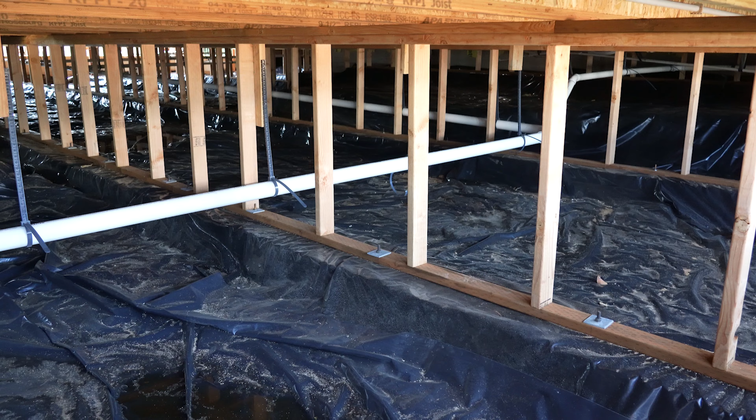This is the State Code Update Training for the 2023 Oregon Residential Specialty Code, also referred to as the 2023 ORSC. This video is the first of a three-part training resource. A separate video covers Chapter 11, Energy Efficiency Provisions of the 2023 ORSC. The third and last video covers Chapters 12 through 24, Mechanical and Fuel Gas sections. Please see these additional videos to view the complete set of significant changes presented by the Division of the ORSC.

All BCD Residential Inspector and Residential Plans Examiner certification holders are required to complete code-related update training, which is provided by the Division. The various certifications that require this training are the Residential Structural Inspector Certification, also known as the CAS, the Residential Plans Examiner Certification, the CAX, the Residential Mechanical Inspector Certification, or CAM, the Specialized Finals Inspector Certification, or SFI, and the Specialized Solar Photovoltaic Certification, the SSI.

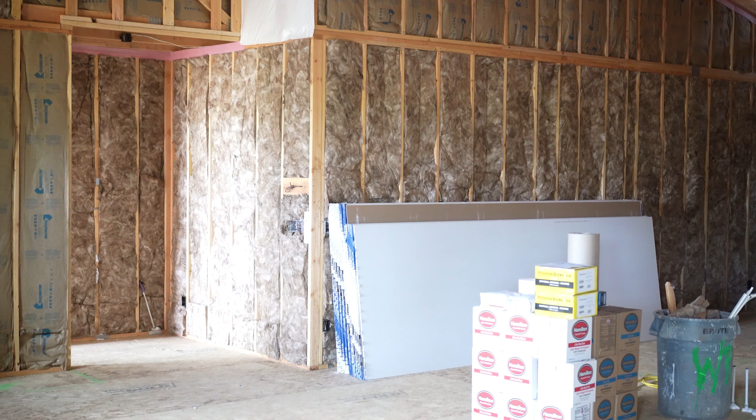The objective for this training is to identify the significant technical changes to the structural, fire and life safety, and general design requirements resulting from the adoption of the 2023 ORSC. At the end of the video, Division contact information will be provided, where you may submit any questions or feedback. Up-to-date contact information for each presenter is also available on the Division's website.

Information about the new 2023 ORSC, such as code adoption process, codebook availability, and code-related publications, is available on the Division's website on the Codes and Standards webpage. We appreciate your attendance and look forward to working through the updates with you.

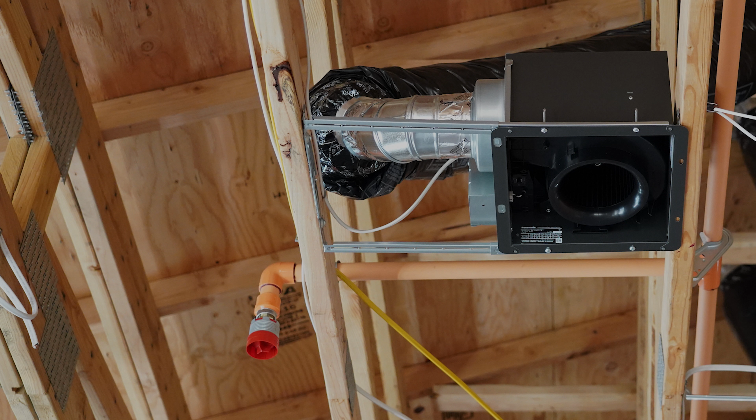As a reminder, our team is a technical resource for our local government partners and other customers. We are always happy to assist and always appreciate hearing from you.

The 2023 ORSC is based on the 2021 International Residential Code, the IRC, with Oregon amendments. For this video, distinct formatting is being used to show the various types of changes. The change summary box highlights the topic covered and provides a brief synopsis. This summary box will identify if the topic is a model code change from the IRC, an Oregon amendment to the IRC, or simply a helpful reminder for a commonly questioned topic where no change has occurred. Where we are highlighting a model code change, we will generally only show the new language added in the 2021 IRC. That language will appear in pink.

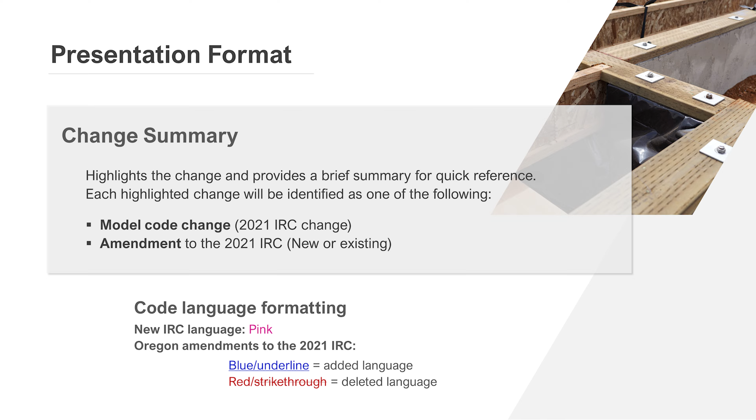Where we are highlighting an Oregon amendment, blue underline will denote added language and red strike-through will denote deleted language. For this training video, the division has created a supplementary code adoption summary that includes all Oregon amendments to the 2021 IRC, the significant IRC changes highlighted in this video, and other important information about the new code. The code adoption summary is linked in the video description below, along with the chapter timestamps to aid in navigation through this presentation.

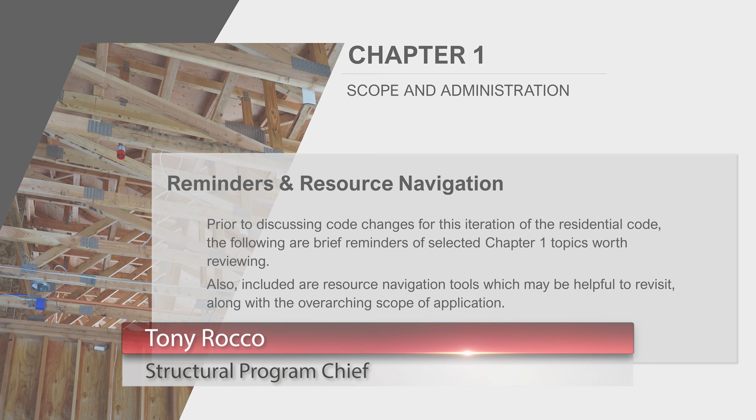Before we get started on the 2023 ORSC code updates, beginning in Chapter 1, we'll set the stage with reminders of how critical it is to always consider the scope of a given code prior to jumping into the technical requirements. For the ORSC, the overarching scope and application are detailed by the leading provisions of Chapter 1.

Over the past 5 years, our division has worked with our legal counsel, local government partners, OBOA, stakeholders, and other customers to further clarify the administrative provisions of both the OSSC and ORSC. Particularly under the ORSC, national model scope creep had created a significant misalignment from our governing authority and statutory charge. On the next slide, we'll quickly revisit the concept of statutory authority in the context of the ORSC scope.

Not all matters included in a nationally promulgated model code are necessarily covered by our statutory authority here in Oregon. This is a key concept to always remember. Just because something is included in the IRC, IBC, or IFC nationally doesn't automatically establish legal authority to regulate that same matter here in Oregon. Oregon revised statutes detail legal authority, not a nationally promulgated code.

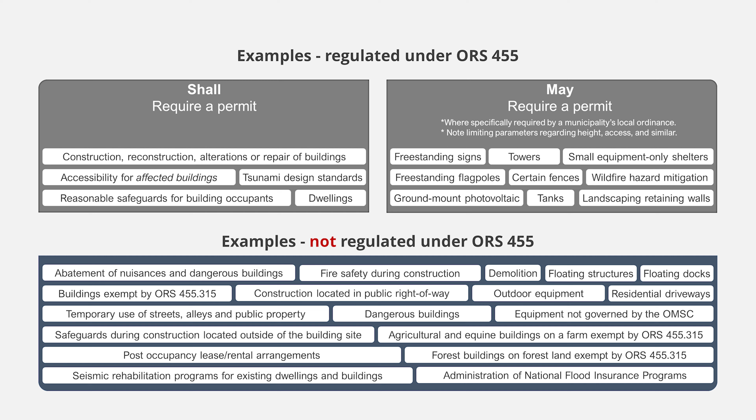As we move into the first slide listing an ORSC section, we keep the consistent theme going of our overarching scope and application, setting the stage for reviewing these code updates.

Looking historically at the original intent and purpose of creation of a dwelling code, it's important to note that it once started out as a collaboration of recommended building practices for places of abode.

Fast forwarding to today's modern code, our low-rise dwelling code, which has become our Oregon Residential Specialty Code, is for residential uses in detached 1- and 2-family dwellings and townhouses. In recent years, we have clarified that other dwelling uses, such as day-to-day business operations, are more appropriately addressed by the OSSC.

Under the 2023 iteration, live-work units meeting the appropriate OSSC provisions, owner-occupied lodging houses, residential aircraft hangars, and detached 1- and 2-family dwellings and townhouses, and their accessory structures not more than 3 stories above grade, are covered by the scope of the code. Other uses, including congregate living, care facilities, and other licensed facilities, are now addressed more accurately via the OSSC.

In some cases, those uses may be permitted to meet the construction standards of the residential code, but the uses are still addressed through the scope and application of the structural code.

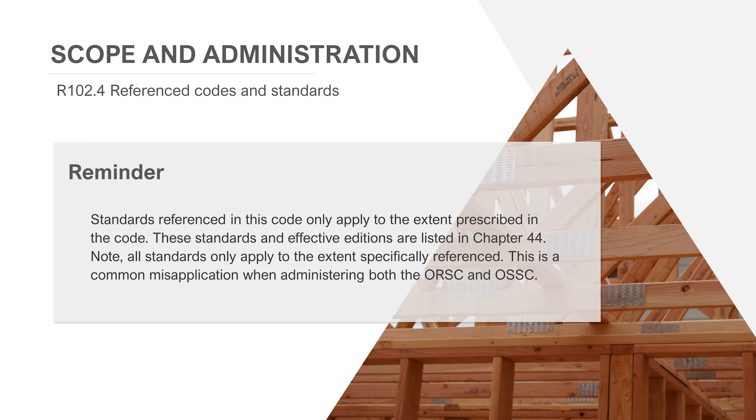Over the past several iterations, our technical team has worked hard to refine the activities listed in section R105.2 as exempt from building permit. In prior iterations from years ago, the list even included items which weren't included in the scope of the code, since the list was originally based on the National Model Code.

A very common misconception is that if some type of activity isn't on the list, then it must mean that activity requires a building permit. Wrong. We don't use the list of exempt activities as some type of reverse authority threshold for requiring building permits. Remember, the scope of the code sets the stage for the permitting authority. Under the dwelling code, we also have a governing statute detailing the items which shall be exempt from permit and fees in our state. This reference is ORS 455-310.

Building on the improvements already made to Section R105.2, in the 2023 ORSC, we have clarified exemptions number 6 for patio, porch, and deck covers, number 8 for non-bearing partitions, 13 for door and window replacements, and number 15 for membrane-covered frame structures. In number 6, we add deck cover to the list of exempt covers and removed a requirement for them to be supported by an exterior wall. Similar to the common detached non-habitable accessory structure in exemption number 1, these outdoor space covers can either be attached or detached, but not more than 200 square feet in usable area.

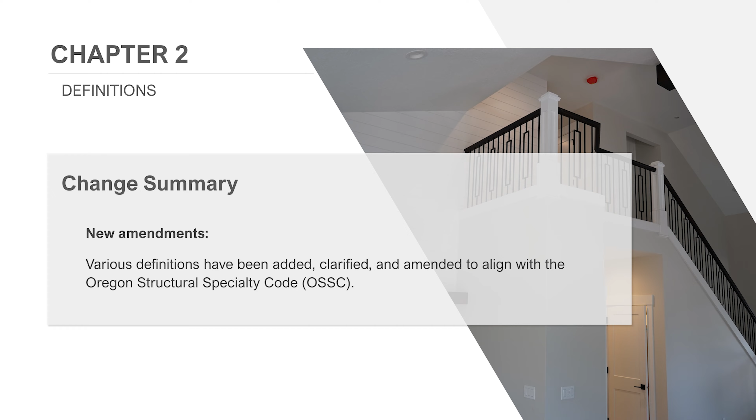Section R202 and our definitions play a critical role in application of the code. Often we overlook highlighting defined term changes during the update training, but for this iteration of the ORSC there are several important changes. Both building area and floor area have been added as long missing defined terms to help clarify the intended limits listed throughout the code. Building area aligns with the definition we know from the OSSC. As we just covered in R105.2, we see the new definition for membrane-covered frame structure to narrow that specific exemption.

Most importantly, the definition of accessory structure has been aligned with the National Model Code. In the 2015 iteration of the IRC, the 3,000 square foot and 2-story limitation from the definition was removed. The accessory structure limitation was originally introduced in 2008 and never matched how the code scoped governed buildings.

The size and height limits have been removed from the ORSC and no longer limit the size and shape of accessory structures. As we covered in Chapter 1, the code still limits all governed structures to a maximum of 3 stories above grade plane in height, but there is no size or square footage limitation for dwellings or now accessory structures. This common sense model code change underscored that most local land use laws will limit accessory structure size, and that it's not aligned with the overall hierarchy of code to limit square footage.

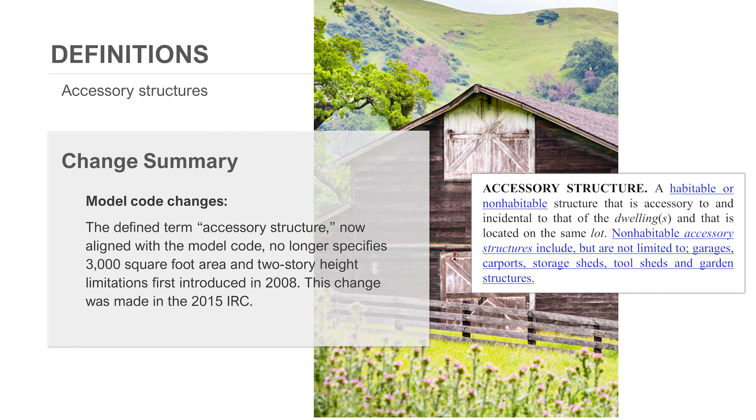Our team will be taking a closer look at this code inconsistency in the near future and will hopefully arrive at a reasonable solution, providing clarification necessary to support predictable statewide application of the exemption for Oregonians.

Hi, this is Jeremy Williams, Structural Program Engineer with the division. I'll be covering some of the structural design related updates in chapters 3 through 6.

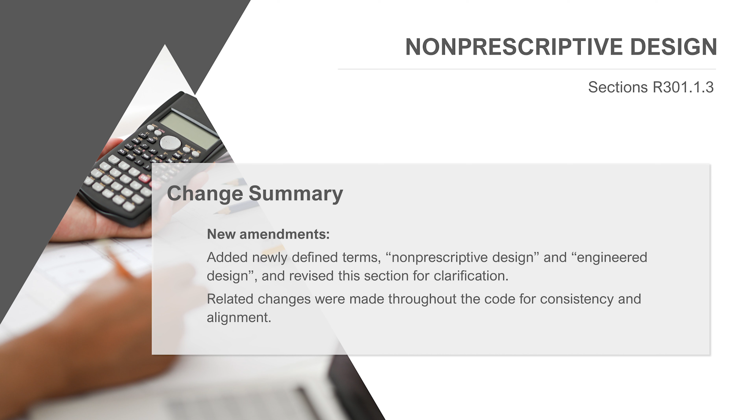Section R301.1.3 has been clarified and renamed from Engineered Design to Non-Prescriptive Design. The Code Adoption Advisory Committee recommended changes here to help reduce confusion regarding the trigger, enforcement, and review of designs or portions of designs that fall outside the prescriptive recipes within the ORSC.

Non-prescriptive design is now a newly defined term, which includes two types of designs: those required to be prepared by a registered design professional, and those exempt from that requirement per Oregon's engineering and architecture licensing laws. This section now requires the submission of a non-prescriptive design instead of an engineered design for your review and approval for portions of the project that fall outside the prescriptive provisions of the code. This will make more sense as we look at the new definitions.

But before going there, note that the lower portion of this section has been struck. That portion was originally recommended as an Oregon amendment during the 2021 ORSC adoption process to clarify scope and intent, but was recommended for removal this cycle because it contradicts the preceding sentence, which allows a design in accordance with the OSSC.

Here are the new definitions for non-prescriptive design and engineered design. Non-prescriptive design is defined as the design of structural elements exceeding the limits of Section R301 or otherwise not conforming to the prescriptive provisions of the ORSC. The design shall result in a system capable of supporting the loads prescribed in the ORSC or OSSC and provide a complete load path that transfers those loads from their points of origin through the load-resisting elements and foundation to the supporting soil.

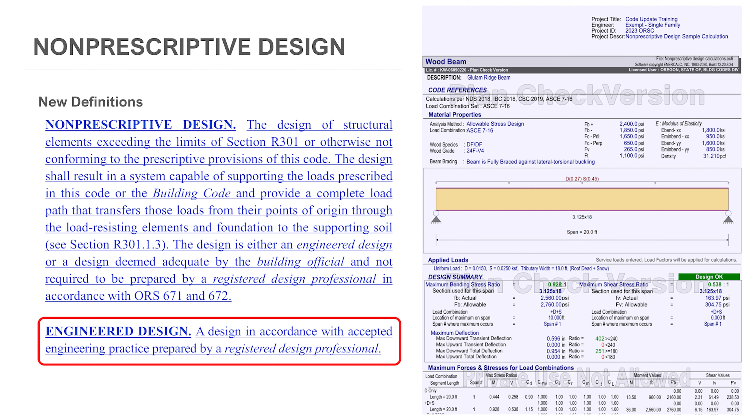A non-prescriptive design is either an engineered design, which is also a newly defined term, or a design not required to be prepared by a registered design professional in accordance with Oregon's architecture and engineering statutes, but deemed adequate by the building official. Engineered design is defined as a design in accordance with accepted engineering practice prepared by a registered design professional.

It's a new specific allowance for submitting electronic plans where allowed by your building department. Some of you have been allowing electronic submission for some time now, while others may not have implemented it yet.

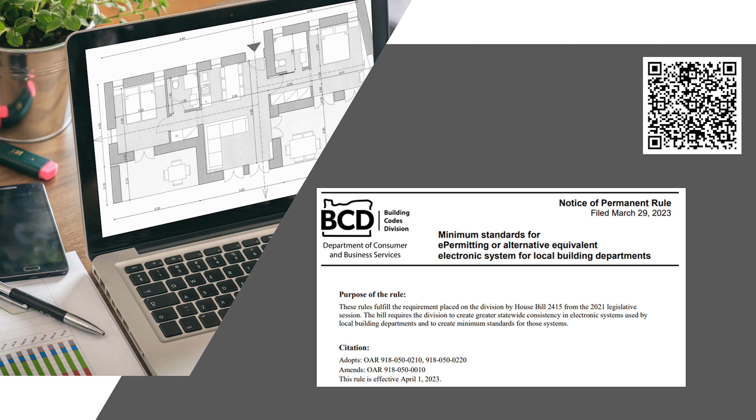Reminder that with the passage of House Bill 2415, which was intended to improve statewide consistency for electronic processes for reviewing plans, issuing permits, and performing field inspections, Oregon Administrative Rule 918-050 was amended accordingly and requires all municipalities to have the capability of accepting electronic submission of construction documents by January 1st, 2025.

As mentioned previously, BCD does not interpret the Oregon State Board of Engineers and Architects rules and statutes. If you have any questions related to their rules and statutes, our best recommendation is that you reach out to them directly. Here's their contact information for your reference.

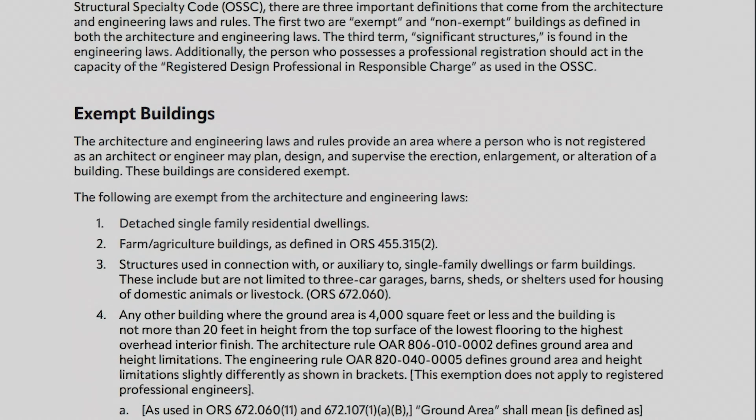We now have a direct path in the residential code for shipping containers that are repurposed for use as dwellings or their accessory structures.

This new model code language points to Chapter 31 of the OSSC for compliance. Also note the new definition in Chapter 2, which is the same as the OSSC.

You may remember that Eric covered Section 3114 when we presented the 2022 OSSC update training last year. It contains both detailed and simplified structural design requirements for the use of containers depending on application. You no longer need to rely solely on an alternative approval process in accordance with Section R104.11 for repurposed shipping containers.

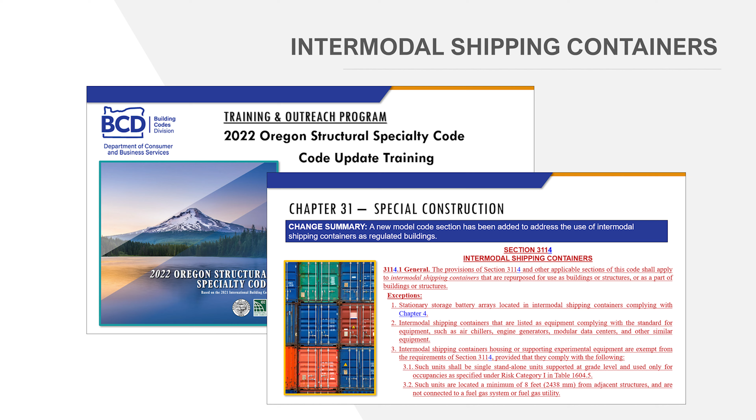Last year, BCD hired CPP Wind Engineering consultants to complete a study of our codified special wind regions and associated basic design wind speeds. The purpose of the study was to update our OSSC and ORSC wind design criteria based on statistical analysis of the most current meteorological data available, in accordance with ASCE 7-16. Thanks go out to the Structural Engineers Association of Oregon and Washington for their collaboration and coordination in this effort.

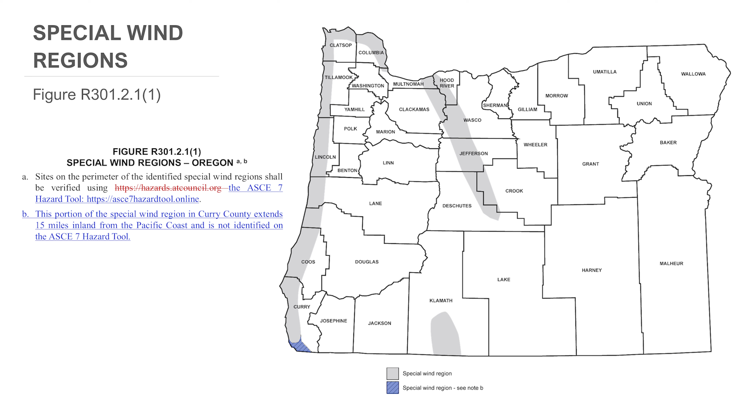The reason for the switch from the Applied Technology Council Hazards by Location tool to the ASCE 7 hazard tool is because the ATC tool will no longer be updated for future editions of ASCE 7. From the ATC website: with the availability of ASCE's hazard tool in the free domain, we feel there is no longer a unique need for the ATC Hazards by Location website, and ATC will be deferring to ASCE for providing free hazard information to the profession.

These same related special wind region wind speed changes were made to Table 1609.3 and Figure 1609.3 as an interim amendment to the 2022 OSSC, so both codes are currently aligned on this subject.

You can find this online tool by reaching the ASCE website or by scanning this QR code. Here's what you see when you navigate to the ASCE 7 Hazard Tool website. First thing you're going to get is this pop-up welcome screen message, which you can close.

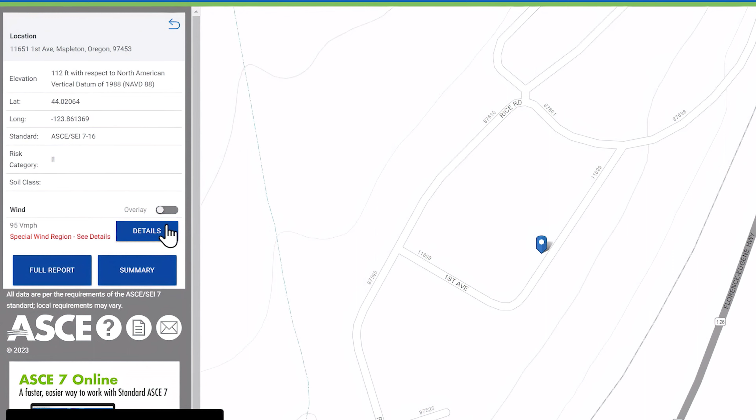Enter your site address of concern. Here I'm entering one in Mapleton, Oregon. You select the reference standard version ASCE 7-16, select risk category 2, toggle on the wind load type, and select view results. You see right away it says we're in a special wind region. See details, and we can toggle this overlay under the wind row here to see that we are in the special wind region hatched pattern.

There's no change to the irregular building section of the code to report on, but we're sharing an IRC provision here that wasn't adopted in Oregon in case you see it in an ICC publication or training course and are wondering about it. The 2021 IRC brought in a new irregularity trigger for homes on steep hillsides based on a proposal from structural engineers representing FEMA and the Applied Technology Council. This was based on findings of vulnerability of such dwellings in the 1994 Northridge, California earthquake.

117 significantly damaged hillside dwellings were identified in reconnaissance reporting, 15 of which had collapsed, and another 15 were found to be on the verge of collapse. The general concept here is that the different rigidities of variable height cripple walls for crawl spaces taller than 7 feet affect the seismic behavior of the structure beyond the assumed behavior contemplated by the prescriptive lateral provisions provided in the code. The Code Advisory Committee recommended disapproving and deleting this new language because they felt the cost increase associated with the new trigger isn't warranted based on no reported issues or concerns in Oregon on the matter.

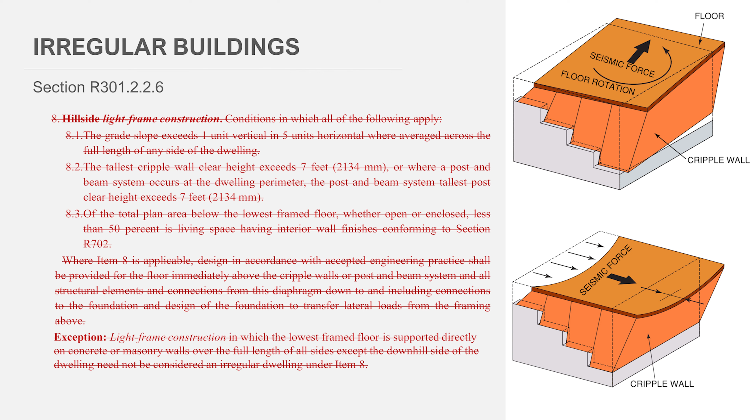The ORSC now points directly to our plumbing code for seismic restraint of water heaters. We've had inconsistent provisions in the past due to language in this section in Chapter 13 of the IRC that differed slightly from the corresponding plumbing code provision.

The only related change in Section 507.2 of the 2023 Oregon Plumbing Specialty Code is that the exception was clarified by specifically adding seismic design category B, which was always the intent. Note that the related historic water heater seismic strapping interpretation number 15-02 is being updated to reference the 2023 OPSC.

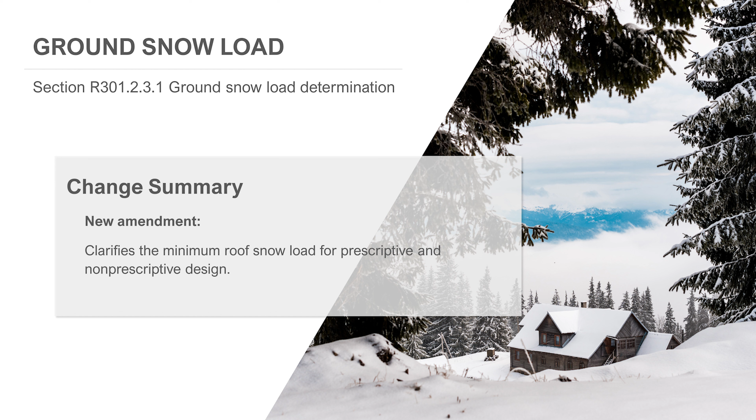Within the ground snow load determination section, we've clarified the minimum snow loads for prescriptive and non-prescriptive design as an Oregon amendment. The minimum ground snow load for use with the prescriptive design provisions and associated tables within the ORSC is still 36 PSF, and the minimum roof snow load is 25 PSF, except where the roof snow load is calculated in accordance with Section 1608 of the OSSC. The key word here is calculated.

Section 1608 of the OSSC refers the user to Chapter 7 of ASCE 7-16 for roof snow load calculation and sets a minimum roof snow load of 20 PSF plus 5 PSF rain-on-snow surcharge for roofs less than or equal to 1 unit vertical in 12 units horizontal, or roofs that constrain runoff by parapets or other similar obstructions. Reminder that the only time roof snow load is referenced for design in the ORSC is in Section R802.10.2.1, Applicability Limits for Wood Roof Trusses, which states that for consistent loading of all truss types, roof snow load is to be computed as 0.7 times ground snow load. 0.7 times the 36 PSF ground snow load equals 25 PSF roof snow load.

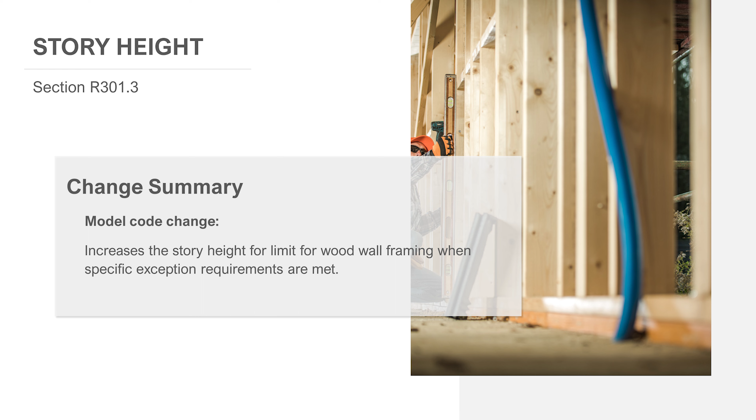A new model code exception in this section conditionally allows wood frame story heights up to 13 feet 7 inches instead of the previous limit of 11 feet 7 inches. To meet this new story height exception, studs greater than 10 feet up to 12 feet in unbraced height have to meet exceptions 2 and 3 of Section R602.3.1, which we'll cover when we get to Chapter 6. The wall bracing for the building needs to comply with Section R602.10, and lateral restraint has to be provided at the bottom and top of the wall by the foundation, floor, ceiling, or roof diaphragm.

A major challenge that each of our local government partners face on a regular basis is deciphering the use of non-technical land use, developer, and real estate terms that don't neatly align with our technical code. Popular terms include condos, triplex, quadplex, cottage, cottage cluster, and even ADU.

Unfortunately, none of these popular terms mean anything under application of our technical code. Most often, the structural configuration proposed, along with the stated intended use, will determine the appropriate code application.

When considering the ORSC limitations, if we have stacked units and more than a single detached two-family dwelling, which is permitted to be stacked, the project will be regulated by the OSSC. If the proposed configuration meets the townhouse definition, where there are no stacked units, and each dwelling unit is separated from the next, from the foundation to the roof, the project will be regulated under the ORSC.

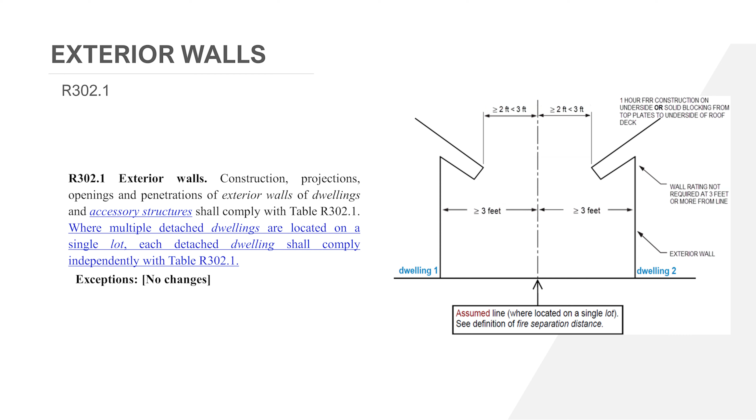Note the long-standing amendment of reduced minimum fire separation distance from the model code 5 feet is retained in our Oregon-specific 3 feet. In many cases, this minimum distance is superseded by local land use laws and required setbacks for front, side, or backyards.

Our historic townhouse provisions of section R302.2 have been retained. Minor, non-technical editorial corrections throughout the section have been made, and in the 2021 iteration of the ORSC, all existing figures were updated and recreated.

Our technical team did propose reducing the number of Oregon amendments and aligning more closely with the model IRC regarding townhouses. One possibility was to retain these existing amendments as a statewide alternate method for customers. However, the committee and advisory board elected to retain the existing R302.2 as it existed in prior iterations.

Additionally, the base model code included a new provision for detached two-family dwellings and dwelling unit separation. That model code change specified that only a single 1-hour wall was required even where real property lines separated the two units of the detached two-family dwelling. This model code change was disapproved by the committee and board, and our existing language was retained, which provides options for customers proposing this real property line separation and specifying not less than a 2-hour separation in these instances.

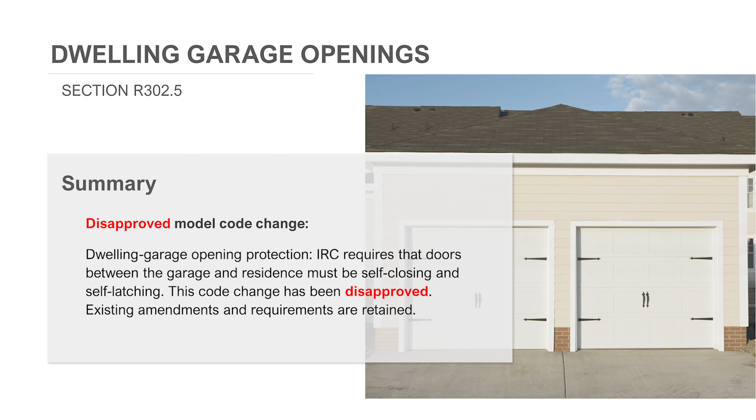As we look at the provision, we see the struck model language at the end of the charging provision in R302.5.1.1.

In Oregon, garage-to-dwelling doors can be solid wood, not less than 1 3/8 inches, solid or honeycomb steel, not less than 1 3/8 inches, or 20-minute fire-rated door assemblies. These doors are not required to be self-closing or self-latching.

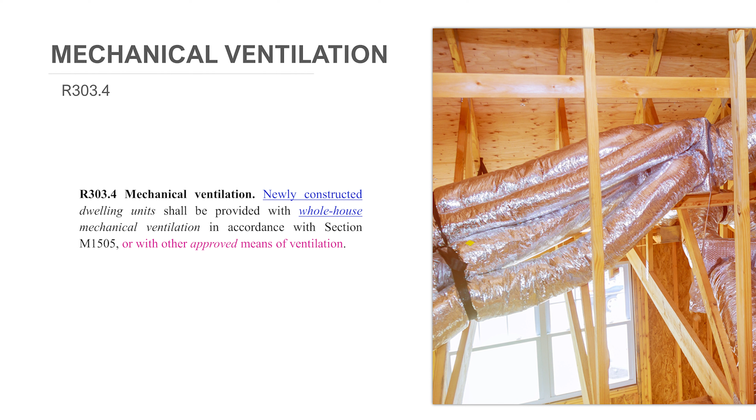This has been added to the provision for clarification. In addition, design flexibility has been included, permitting other means of ventilation to be approved by the building official in place of the prescriptive whole house ventilation system.

Emergency escape and rescue openings, or EEROs, are a major component of ORSC governed safeguards. In the 2023 ORSC, a number of changes have occurred in Section R310, and the next few slides will walk us through those new provisions.

This includes the addition of a minimum 36-inch wide path from an enclosed yard or court to a public way, the replacement of the term window well with the more encompassing term area well for those EEROs located below grade, and additional flexibility for basement alterations, additions, and conversions to habitable space. We'll walk through all of these changes one by one.

One common question, particularly for townhouse configurations, is regarding egress windows which open directly to an enclosed backyard. The long-standing intent has now been codified for this configuration. In prior iterations, while the intent was for a yard or court to open to a public way, the minimum width of that opening from the enclosed yard or court to the public way was never specified.

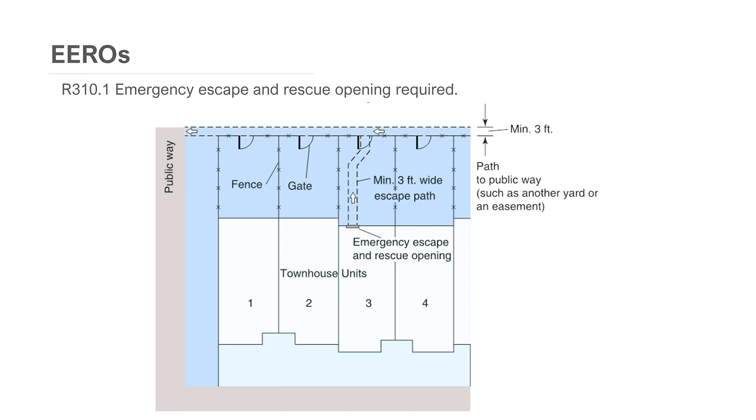In section R310.2.4, the new language specifies that when a required EERO is located beneath a porch, deck, cantilever, or similar projection, not only must our unobstructed pathway be not less than 36 inches in height until we get out from under the projection, but it now must be not less than 36 inches in width as well. Think of this as an unobstructed tunnel, 3 feet by 3 feet clear, until we get out from under that deck, porch, cantilever, or similar projection.

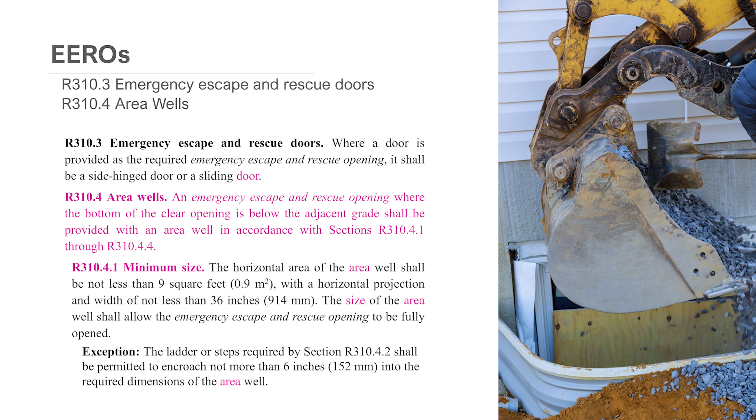In the new 2023 ORSC, the term window well has been removed and merged with the term area well. We see the new charging language in section R310.4, as well as the aligned term throughout the subsections. There are no technical changes to the old window well requirements beyond this terminology adjustment. In the 2021 iteration of the ORSC, both window well and area well existed. Now in the 2023, we only have provisions for area wells.

In section R310.6, we now have an additional exception specific to dwelling additions. This exception points to section R310.7.1 as a deemed to comply option for complying with the EERO provisions in the context of an addition.

We'll cover the details of R310.7.1 on the next two slides, but when considering its application, it's important to note the triggering language. The R310.7.1 compliant EERO is permitted for dwelling additions containing new sleeping rooms and for dwelling additions of basement areas.

Specific to alterations of existing basements, this new provision clarifies two things. First, where a new sleeping room is created in an existing basement, for example a basement conversion, an EERO is required to be provided in that new sleeping room. And where an existing basement undergoes alterations or repairs, including a basement conversion to habitable space, an emergency escape and rescue opening is not required from the basement area.

Similar to the exception added for dwelling additions in the previous slide, this provision has an identical exception permitting the EERO in the converted basement's new sleeping room to meet R310.7.1. Let's take a look at that provision.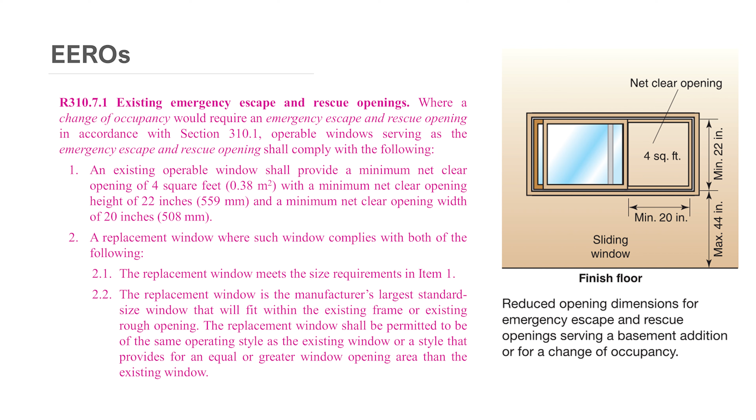Here in section R311, several important changes have occurred. First, in subsections R311.7 and 8, we have existing Oregon language retained as well as alignment with new model provisions regarding stairways and ramps which are regulated and those which are not. There are several common nuances to note here.

Next, a new model exception has been added regarding exterior landing slopes where the landing must facilitate surface water drainage away from the building. In addition, we've also included a critical reminder from ICC about the bottom landing of exterior stairways that is commonly overlooked.

When considering stairways, it's important to make the distinction between regulated stairways and those stairways which are not regulated. In the 2021 ORSC, we included new Oregon language intended to help clarify application of R311.7 throughout the state. Here in the 2023 iteration, that language is further clarified.

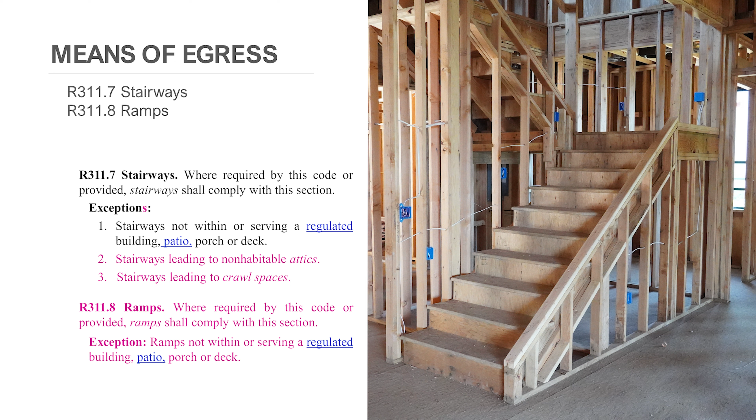Stairways which are not regulated by R311.7 include any stairway not within or serving a regulated building, regulated patio, porch, or deck. Any stairway, drop-down ladder, portable ladder, etc. leading to non-habitable attics, such as storage attics, since storage is not habitable space, and any stairways, ladders, steps, etc. leading to crawl spaces, as defined.

These are critical nuances to consider. The most common is regarding the bonus truss attic storage space. Assuming the space is for storage only, which is non-habitable, customers can use drop ladders, portable ladders, potentially non-compliant stairs, etc. to access the non-habitable attic. Additionally, ramps not within or serving a regulated building, regulated patio, porch, or regulated deck need not meet the provisions of section R311.8.

Under our long-standing stairway walking surface slope limitations, we now see a new model exception here in section R311.7.7. This exception now allows a steeper slope for exterior stairway landings required elsewhere in code to drain surface water from the landing.

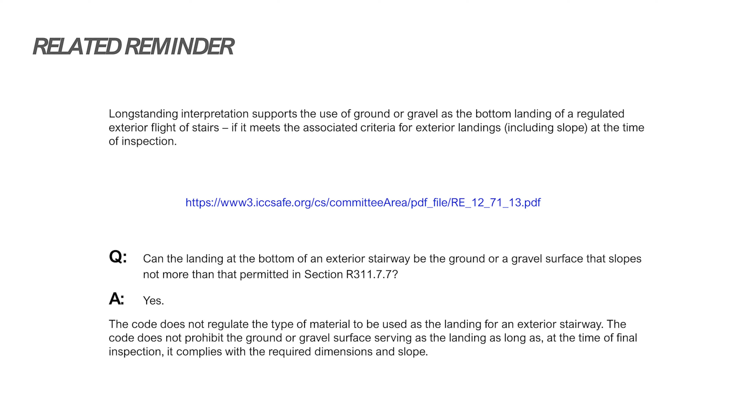Here's a great clarification regarding our measurement for determining when window fall protection is required. While we have clarified this measurement several iterations ago for our maximum EERO height above the finished floor, this measurement detail was only delineated previously via interpretation and ICC's stated intent. Now, in section R312, the language clarifies that the measurement is taken from finished floor to the bottom of the clear opening. Another important reminder is that this threshold for requiring fall protection is intentionally different when considering ORSC-governed dwellings and OSSC-governed Group R2 units. The OSSC threshold remains at 36 inches, where our ORSC trigger remains at 24.

Here we have a section view and detail of our measurement and other considerations to trigger the fall protection safeguard. The bottom of our clear opening must be at 24 inches or higher above the finished floor, or we must have less than 72 inches of fall to either grade or a flat surface at least 36 inches in width on the exterior side of the window to not need fall protection.

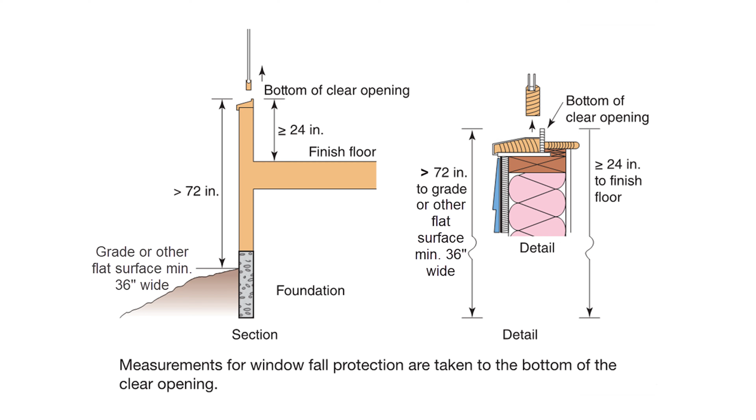Section R314, smoke alarms. This change is going to cover a couple of new location requirements for smoke alarms.

The first new location is found in section R314.3. This new requirement will require a smoke alarm at the end of a hallway when there is a room with a ceiling height that is at least 24 inches higher than the hallway. In addition, there's a minor Oregon amendment to this new section where 'bedrooms' is struck and replaced with the term 'sleeping rooms,' because bedrooms is not a defined term in the ORSC.

The next new smoke alarm location requirement is found in section R314.3.1, and is related to proximity to cooking appliances. Items 1 through 3 have not changed. Item 1 requires ionizing type alarms to be installed not less than 20 feet from a permanently installed cooking appliance. Item 2 reduces that distance for ionizing alarms to 10 feet when they are equipped with an alarm silencing switch. And item 3 requires photoelectric type smoke alarms to be installed not less than 6 feet from a permanently installed cooking appliance.

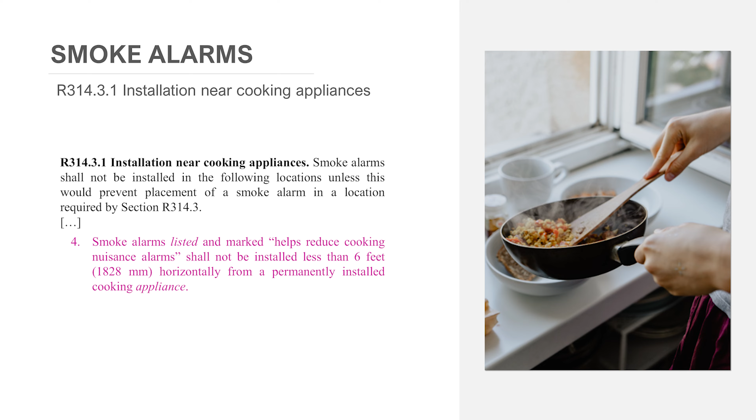Section R317, protection of wood and wood-based products from decay. The provisions for the protection of wood against decay have not changed significantly for quite a few code editions, so this update accomplishes a much-needed overhaul. There was no intent with the changes to significantly change the technical content, only to clarify the requirements and clean up some errors in syntax and correct some misleading text.

Section R317.1. On this slide, we see some changes to items 1, 2, and 3. For item 1, columns were added to give them a required clearance from exposed earth in crawl spaces. This isn't really new; it's generally in conformance with the old exception that was deleted. Item 2 also includes columns, and again, this was to find a home for that requirement due to the deleted sections. And then item 3 is an existing Oregon amendment specifying what can count as an impervious moisture barrier.

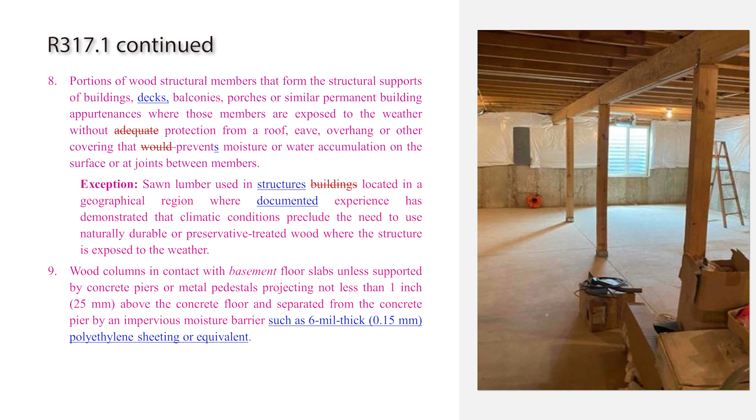R317.1 continued. Now we move on to items 8 and 9 in the same section. As you can see, there's a lot of pink language, which indicates new model code language. For item 8, the language was actually moved from a deleted section, R317.1.3, for geographical areas. This language seemed to require wood members exposed to the weather to be treated or naturally durable only if a need was demonstrated. The code now requires protection as the general rule and provides an exception for drier geographical regions. Note that an Oregon amendment is added to that exception requiring that need to be documented.

For number 9, this language was also deleted from section R317.1.4, and this is the language that allows the 1-inch clearance for wood columns with basement concrete slabs. Also an Oregon amendment there clarifying what works as an impervious moisture barrier, or at least an example of what would work.

Section R320, accessibility. This change is intended to clarify the accessibility provisions that are specific to live-work units. When we get to section R320.1, you can see that there are some amendments there also. Now, those are existing amendments, so no change there.

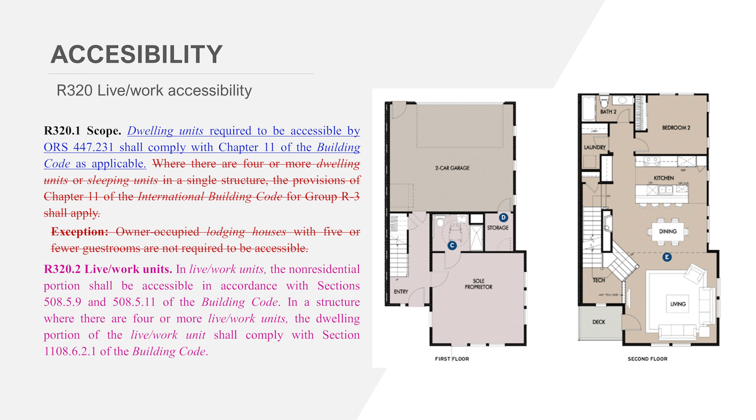The change is in R320.2, specific to live-work units. This change is clarifying that the non-residential portion of a live-work unit is subject to accessibility. There's a reference to 508.5.9 and 508.5.11 of the Oregon Structural Specialty Code. 508.5.9 is a general reference to Chapter 11, and 508.5.11 is a reference for accessible plumbing features. There's also additional language that clarifies where there are 4 or more live-work units, the dwelling portion shall comply with Chapter 11 of the Building Code based on the configuration.

Section R323, storm shelters. This change includes some new model code language that is deleted and also a new model code definition.

In section R323.1, we find part of the related changes. Also just a reminder that this section is existing and it doesn't require storm shelters to be constructed. It does provide some guidance for where storm shelters are constructed and how they are to be constructed.

You'll note that the sealed documentation language in red is struck out here. That's the new language that was added to the 2021 IRC. This was struck to align with our Oregon requirements for OSBAE and OSBEELS, where a registered design professional is not required. And finally, you can see the new definition that was added for storm shelter.

Section R324, Solar Energy Systems. This change is a fairly large one in that it incorporates the previously approved provisions that were found in the OSSC into the ORSC without any technical changes. The rooftop-mounted photovoltaic systems requirements will now be found entirely in Section R324 for those within the scope of the ORSC. This language was brought over unchanged from the structural code previously found in Section 3111. That language is still in the structural code and will be amended as we move forward for that next iteration. No changes in the requirements at this point.

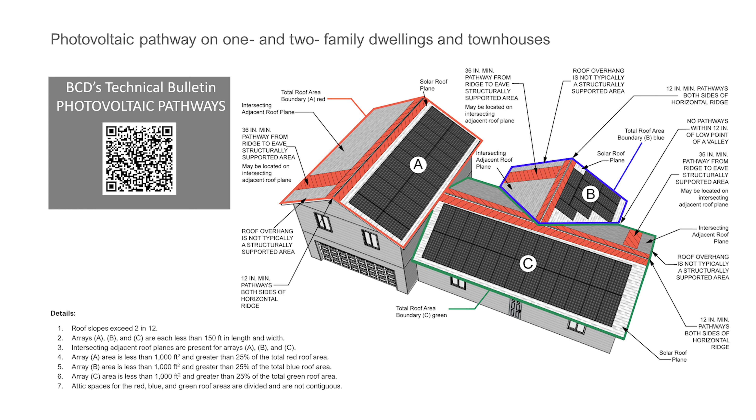Still in Section R324, we're going to talk about some clarifications that have been made to firefighter access and escape requirements. Firefighter access and escape pathways related to rooftop solar can be a little daunting to apply. So recently, the division developed a new technical bulletin intended to clarify and explain the provisions. A link to that bulletin is on this slide, as well as an example of one of the illustrations. The bulletin helps to explain things like what an intersecting adjacent roof is and how to deal with scenarios where there are disconnected attic spaces.

Section R324.7, Solar Ready. This change incorporates some of the existing Solar Ready provisions that were found in the 2021 Oregon Residential Reach Code.

Section R324.7.2, Solar Ready Construction. So the provisions you see on this slide are new to the ORSC. They were brought in from the 2021 Reach Code. And then all of the existing Solar Ready provisions were moved from Chapter 11, Section N1107 to 324.

For the change you see here, these four exceptions were brought over from the Reach Code, and they allow some variance to whether or not solar ready construction needs to be included. There are provisions for size, provisions for total solar resource fraction. So if there's not enough sun, then it doesn't make sense to put it in, and that term is newly defined as well.

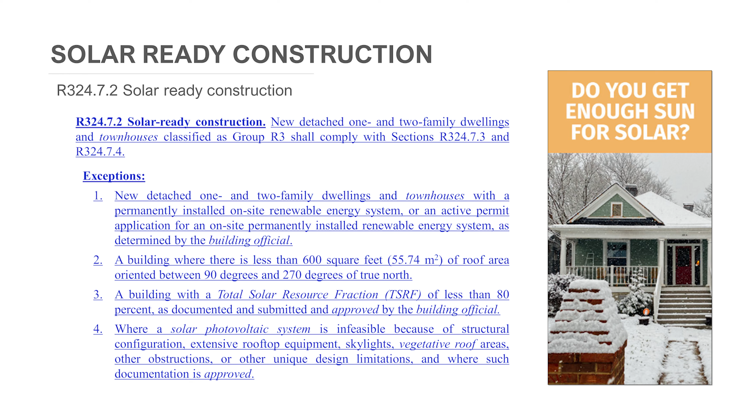Moving on to Section R324.7.3, the only change here to these provisions is a move. These were previously found in the 2021 ORSC in Section N1107.4. These are the interconnection pathway requirements, and they were simply moved to this section.

The final piece to these solar ready provisions is a new requirement that also came from the 2021 Reach Code, for some reserved panel space. There needs to be 2 dual pole circuit breaker spaces reserved, and it needs to be marked reserved for future solar.

Still in Chapter 3, now on to Section R327. R327 covers wildfire hazard mitigation, and we're going to talk about some changes to the scoping and some upcoming changes that are going to apply to R327.

The primary change to the existing R327 has to do with the scoping provisions. The previous scoping provisions have been deleted and replaced with what you see here in R327.1.1 for local adoption. This allows a local jurisdiction to adopt this section without following the local adoption statute 455.040. There's a few requirements tied to the adoption.

The other piece to the local adoption scoping changes is a requirement for notification found in Section R327.1.2. This section requires a local jurisdiction to notify the State of Oregon Building Codes Division and also provide a copy of any locally adopted map showing the areas where R327 is going to apply.

The final piece to the R327 discussion is what this looks like moving forward. Many of you are probably familiar with Senate Bill 762 from back in 2021 that was passed by the legislature following the 2020 wildfires. And then in 2023, Senate Bill 762 was revised under Senate Bill 80.

The piece that ties to R327 for these bills is the creation of a wildfire hazard map statewide. When that map is finished, which is still currently in the works, any homes located in areas designated as high hazard and also within the wildland urban interface will then be subject to R327.

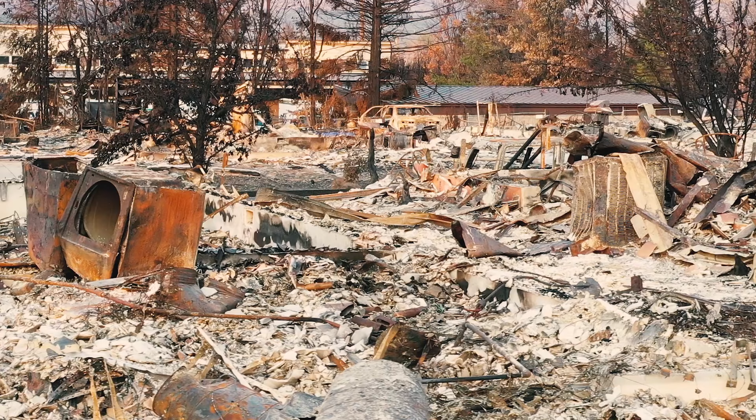So after the map is finished, there'll be a 6-month grace period before R327 becomes mandatory. Also, any local jurisdiction adoption that we discussed in the previous slide, or that had previously adopted before the scoping changes, those will be supplanted by this new wildfire hazard map.

In Section R401.2, an Oregon amendment we had in prior iterations has been brought back by recommendation of the Code Advisory Committee and Board. This is the requirement to provide lateral restraint between the bottom of the foundation wall and top of footing construction joints in low seismic regions. Although there is no specific requirement for this in the IRC, we confirmed that this requirement aligns with ACI 332, PCA 100, and the assumptions built into the IRC.

As you can see, this provision is now much more specific than the prior amendment. It provides a keyway width and depth dimension and location requirement, and also provides an option to use the vertical bar with standard hook at 48 inches on center option in accordance with Section R403.1.3.1, which is the requirement for high seismic regions.

Or the applicant can propose any other lateral restraint option for your review and approval. Again, this is consistent with meeting the model code intent and assumption that foundation walls are laterally restrained at their top and bottom.

Remember that the intent of this section is to prevent overloading the main floor diaphragm in high seismic regions by limiting its span. You now see that the bracing requirement is for exterior walls and required interior brace wall panels of buildings in D0 through D2 are to be supported by continuous footings in accordance with the new table R403.1.2, in lieu of the confusing part of the provision which had an embedded exception followed by an additional exception.

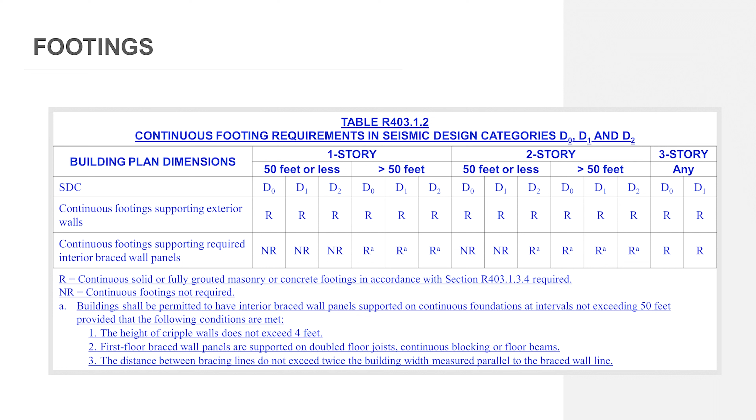So now you can simply apply your project-specific variables to the table to quickly determine the requirement. There's no change to the application. It's just been changed to tabular format with a footnote for clarification and consistency.

Some of you may have had a local policy on whether or not you allowed wet setting mud sill anchor bolts because the code didn't specifically address it. This model code change now allows wet setting them under certain conditions.

Where the builder chooses to wet set the mud sill anchor bolts, the code requires that they vibrate the concrete if there is physical resistance or consolidation is hindered when they attempt to place them. As you can see, this is a risk that the contractor will be taking on and not subject to your foundation inspections if they choose to wet set.

Note that this does not include proprietary anchorage products such as hold-down anchor bolts, which are required to be installed in accordance with the manufacturer's installation instructions.

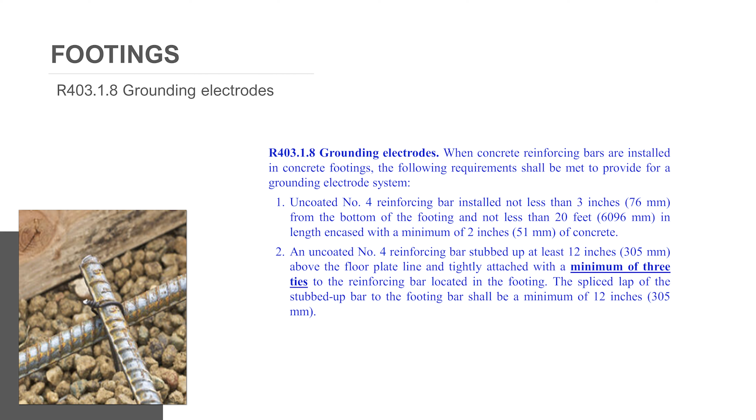Section R403.1.8. This change includes a new minimum tie requirement for grounding electrodes. The grounding electrode language that you see here on this slide is all blue because it's all existing Oregon amendment. And for clarity, only the new language is underlined. So the new language is in item 2, which further clarifies what tightly attached means.

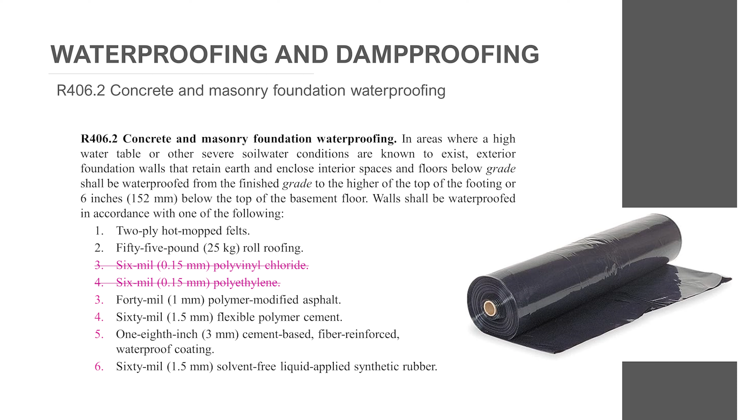Section R408, underfloor space. This change is a reorganization for clarity. The underfloor space reorganization of section R408 includes a breakout of a long-running paragraph that is now broken into numbered sections to help clarity. It also clarifies that the 1 to 150 ventilation rate is only applicable in radon counties.

The lower rate is allowed elsewhere because vapor barrier is required as a minimum. And also the language that was previously found and is still found in Appendix F was moved to this section as well that prohibits coverings over ventilation openings in radon areas.

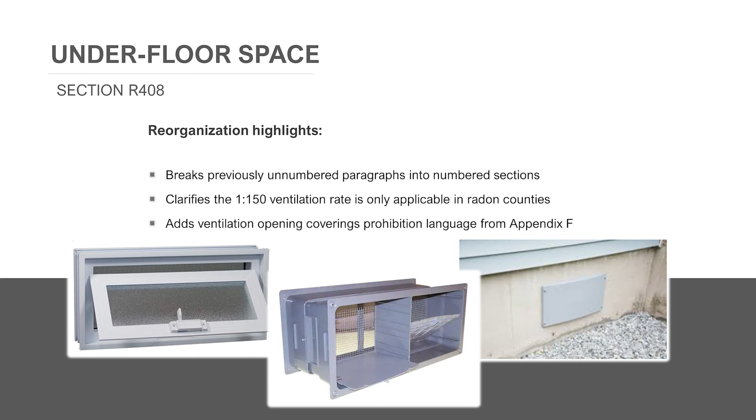Section R506. This change retains the Oregon Amendment for 6 mil vapor retarders under concrete slabs. Along with the previous requirement that removed the 6 mil allowance for concrete walls and foundations, the model code also made a change to R506.2.3 that removed 6 mil polyethylene for under concrete slabs and replaced that with a minimum 10 mil that met ASTM E1745.

Because the 10 mil was not readily available, especially meeting that ASTM standard, the governing board decided to stick with the language previously for 6 mil. So the 10 mil was not accepted, and the 6 mil still is allowed in Oregon.

There were quite a few changes that occurred in both the 2021 and 2024 IRC that expanded the prescriptive deck design options and provided further clarifications on existing provisions. The Code Advisory Committee recommended jumping ahead and pulling in provisions from the 2024 IRC to reduce the number of times stakeholders have to shift gears on learning these provisions.

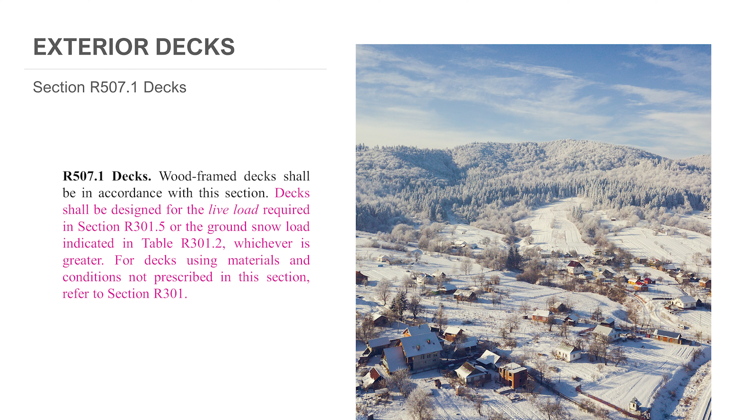Remember that Section R301.2.3 snow loads says that buildings in regions with ground snow loads greater than 70 PSF shall be designed in accordance with Section R301.1.3, non-prescriptive design. You'll see this expansion from 40 PSF to 70 PSF ground snow load limit in all of the prescriptive tables throughout this section.

The wood materials subsection no longer mandates preservative-treated or naturally durable lumber, and instead only points to Section R317 for compliance. As Eric pointed out earlier, you have the exception to Item 8 of Section R317.1, which provides flexibility to use lumber other than naturally durable or preservative-treated where your local climate conditions allow. Although these changes are shown in blue underline here as an Oregon amendment, they are from the 2024 IRC. This will be the case for the remainder of the changes shown in Section R507 unless I note otherwise.

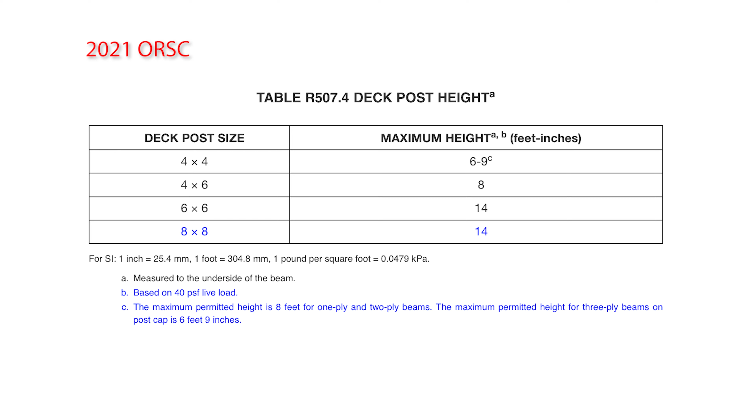As you can see, the deck post height table R507.4 has changed significantly. Previously, the height limit in the table was only a function of the post size specified. Now there are additional variables such as ground snow load up to 70 PSF, post species, and tributary area, which is consistent with the minimum footing size table you've become familiar with in the 2021 ORSC. Although I'm only showing part of the table here for simplicity, it takes up about 2 pages in the code because there's additional rows of different species for each loading scenario that includes southern pine, redwood, western cedars, ponderosa pine, and red pine posts.

So now when you calculate the tributary area to each deck footing when doing your minimum footing size check using table R507.3, you can use that same tributary area calculated with table R507.4 to check the maximum post height.

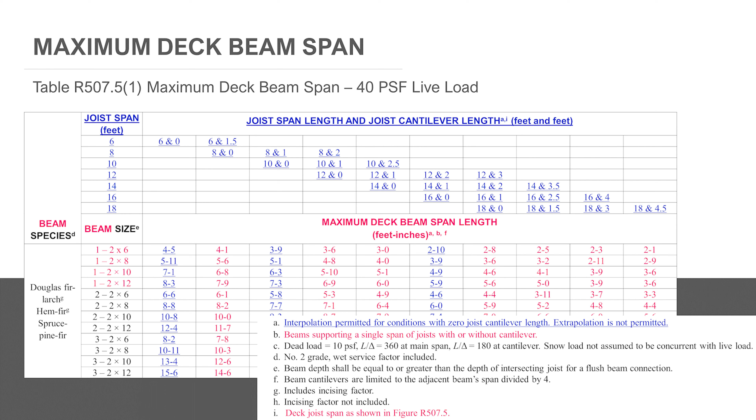The deck beam span tables were reformatted, expanded, and revised in the 2021 IRC, as shown in pink here, and further changes were made during the 2024 IRC process, as shown in blue. Instead of just 2 rows for wood species, there are now 3, but note that I'm only showing 1 here for clarity. You can see that single-member 2x beam options have been added for all wood species, and the table has been expanded to capture various joist cantilever conditions.

There are 4 different deck beam span tables depending on the loading condition. Table R507.5 parenthetical 1 is for 40 PSF live load, and tables R507.5 parenthetical 2 through 4 are for 50 through 70 PSF ground snow load respectively. Note that per footnote A, interpolation is only allowed where the deck joists do not have cantilevers. As you can see, the changes to these tables broadens the application of prescriptive deck framing and reduces overly conservative prescriptive designs from past code iterations. Although these tables have expanded, they are more seamless to use for design and plan review.

Let's see what minimum size hem-fir beam would be needed for this example, assuming 70 PSF ground snow load. The deck joist span length is 14 feet with a 3-foot 6-inch cantilever span length, and the deck beam span length is 8 feet. Going back to table R507.5 parenthetical 4 and looking at the 14-foot joist span row and finding the associated column with the 3-foot 6-inch cantilever span length, we follow it down to the allowable span that's equal to or greater than our 8-foot span to determine the required beam size. For this example, we see a triple 2x12 hem-fir beam is acceptable.

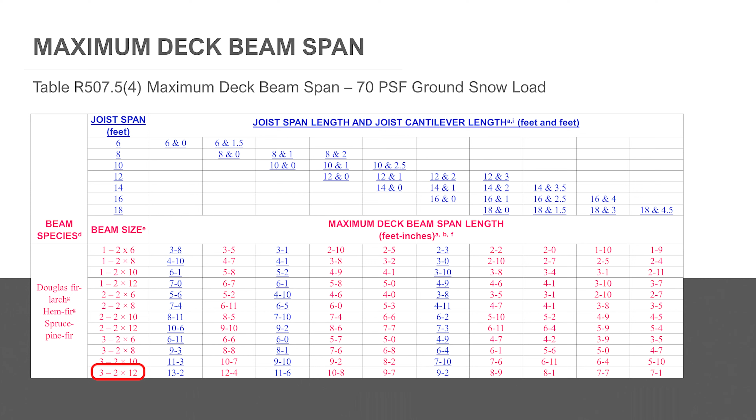Consistent with the changes we saw for the deck posts and beam tables, the maximum deck joist span table has been expanded. It now includes up to 70 PSF ground snow load conditions and additional rows of different species for each loading scenario that includes southern pine, redwood, western cedars, ponderosa pine, and red pine, in addition to the Doug fir, hem fir, and spruce pine fir rows that I'm showing here. Also note that the allowable deck joist cantilever is now completely captured by this table instead of having to check the tabular value against the 1/4 the joist span value as was required in the 2021 ORSC.

The 2021 ORSC had a footnote buried in the deck fastener and connector specifications table requiring the user to comply with the NDS for lag screw pre-drilling requirements to avoid splitting the deck ledger. This was definitely not helpful for users unfamiliar with the NDS. So the 2024 IRC struck that requirement and instead added specific pre-drilling requirements for the 1/2-inch diameter lag screws consistent with the NDS. The installer first needs to drill a 5/16 to 3/8 inch diameter hole through the ledger and all the way through the floor band joist. Then drill that hole to a 1/2-inch diameter just through the ledger and exterior wall sheathing.

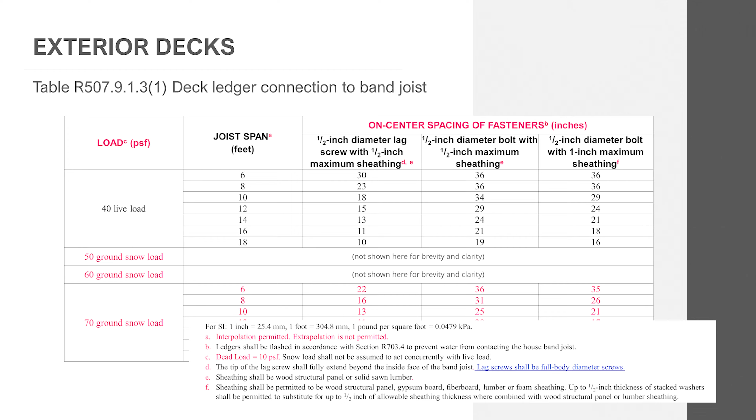The last change to mention in section R507 is the added flashing detailing for the ledger attachment. You first see it in the ledger attachment figure, where it now specifies the L or Z flashing under the decking against the exterior wall, and specifies that the WRB be lapped over that flashing for consistency with the minimum weather-resistant exterior wall envelope requirements in Chapter 7.

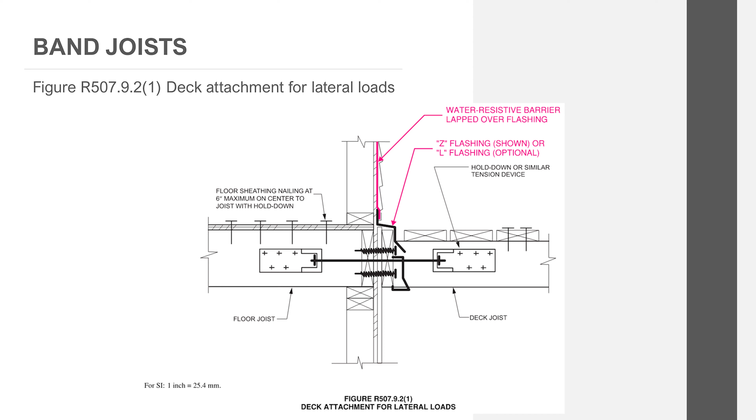The same added flashing detailing has been added to figure R507.9.2(1), the through-bolt with tension connectors option for an attached deck lateral restraint system. It was also added to figure R507.9.2(2), the other option shown in the code for a deemed-to-comply attached deck lateral restraint system.

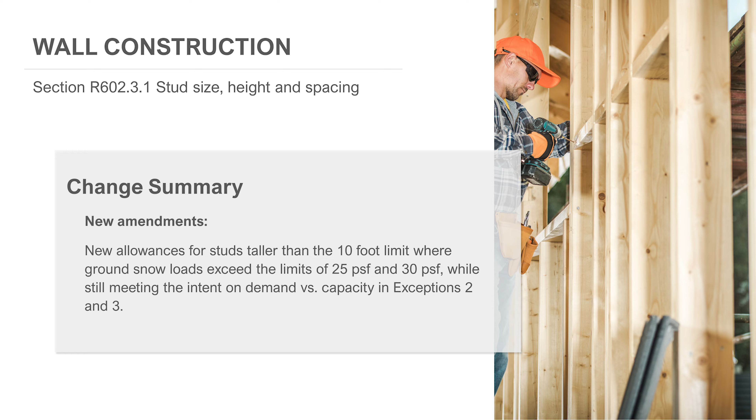The base requirement for prescriptive stud size, height, and spacing is still per table R602.3(5), which limits their height to 10 feet. The only way to prescriptively allow studs taller than 10 feet is to comply with exceptions 2 or 3. The Code Advisory Committee recommended amending these exceptions to work with our minimum ground snow load of 36 PSF. The model code set an upper threshold of 25 PSF ground snow load for exception 2 and 30 PSF ground snow load for exception 3, so neither one could be applied outright in Oregon.

During the 2017 ORSC update training, we explained how you could approve scenarios with ground snow loads greater than 25 PSF as long as the tributary load to the studs was within the intended code limit. And exception 3 was struck at the time as an Oregon amendment because the reference table couldn't be used with ground snow loads greater than 25 PSF.

Now, exception 2 specifically allows Doug fir number 2 studs at 16 inches on center up to 18 feet in height, or up to 20 feet in height when spaced at 12 inches on center, where the basic design wind speed is less than or equal to 130 miles an hour and supporting a roof only with max tributary load of 150 pounds per foot of site-specific ground snow load. So no change to how we informally interpreted this for the 2017 ORSC, but now it's codified for the 2023 ORSC.

And the 30 PSF ground snow load limit in exception 3 has been changed to 36 PSF to allow use of table R602.3(6), which is the alternate stud size, height, and spacing table. To make this table work with the 36 PSF ground snow load limit instead of the model code limit of 30 PSF, the maximum roof and floor spans in the table were reduced to 83% as an Oregon amendment. 83% of 36 PSF is 30 PSF, so the tributary snow load to these studs is the same for the 2023 ORSC as the model code.

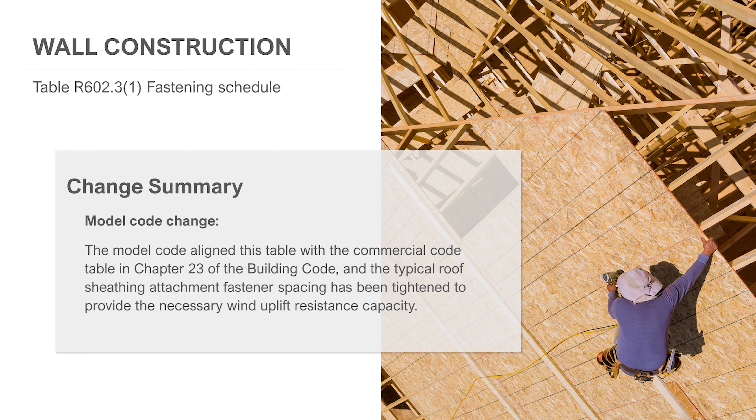Item 1 has added roof rafter and roof truss blocking fastening provisions. Item 12 is just a relocation of the king stud to header fastening requirement that we saw buried in section R602.7.5 of the 17 ORSC, with more fastener options now. And items 31 through 33 have been updated.

Specific to roof sheathing up to 3/4 inch thick, note the significant change from 12-inch on-center fastener spacing at intermediate supports to 6 inches on center, and the requirement per footnote F to further tighten that spacing to 4 inches on center for gable end roof framing and intermediate supports within 4 feet of roof edges and ridges, where the basic design wind speed is greater than 130 miles an hour in exposure B or greater than 110 miles an hour in exposure C. Since the roof sheathing nailing may not be easily observable during your inspections, you may want to consider noting it during plan review, or as a courtesy, informing your general contractors and framers during inspections to make them aware of these new roof sheathing fastening requirements.

There's also a significant related change in the alternate Table R602.3 footnote 1, which allows the use of staples to attach roof sheathing.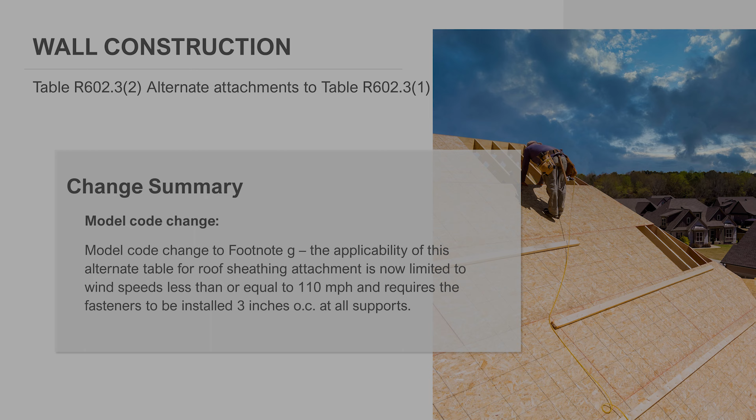In the 2021 ORSC, the tabular values listed could be used for roof sheathing attachments as long as the basic design wind speed was less than 130 miles per hour. But now the roof sheathing footnote G requires that the listed fasteners be installed at 3 inches on center at all edges and 3 inches on center at all intermediate supports, and only allowed where the basic design wind speed is less than or equal to 110 miles per hour.

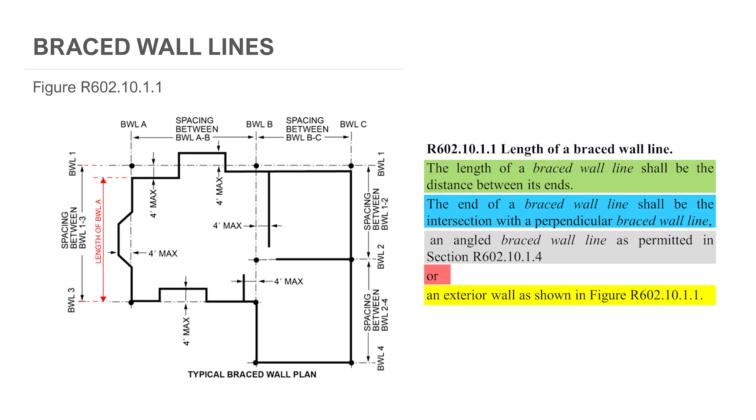The Code Advisory Committee recommended a change to the 900 square foot room exception in Table R602.10.1.3 brace wall line spacing. The new language changes the wording of room to floor area enclosed by brace wall lines to allow more flexibility while still meeting the same model code intent, which is to allow this exception to go from 25-foot wall line spacing up to 35 feet one time on a project without having to adjust the required bracing per Table R602.10.3(4).

This row in this table is somewhat arbitrary and was a proposal that got pushed through at the national level by homebuilder lobbyists several iterations ago to address the regular occurrence of great rooms in today's homes. From a structural design perspective, the lateral force resisting system does not care or know where the interior partition walls are. So this amendment brought forward by the committee makes sense from a practical application perspective and aligns with the model code allowance.

The term floor area used here is newly defined in Chapter 2 and used elsewhere in the code. A reminder is that this 900 square foot exception is not the only path to allow spacings of brace wall lines between 25 to 35 feet in high seismic. Instead, the last row here in this table is the default approach, which just requires that the seismic wall line spacing adjustment factor from Table R602.10.3(4) be applied to the design.

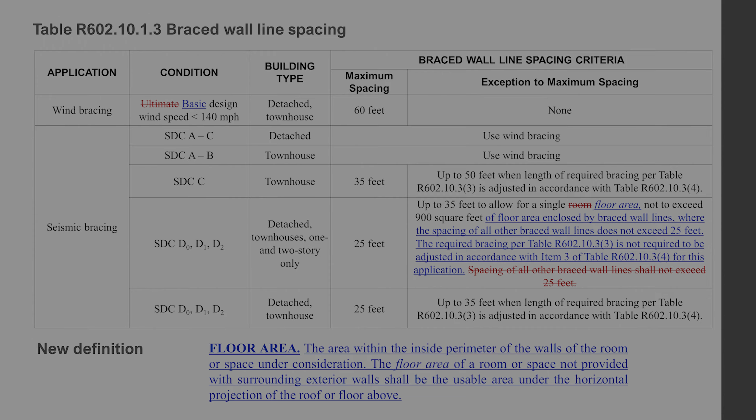A new 10 foot from the end of a brace wall line exception in high seismic regions has been added to clarify the hold down requirements. It clarifies that the hold downs otherwise required for alternate brace walls, portal frames, and BVWSPs meets the intent of the hold down requirement we're familiar with in Exception 1. This change now codifies the informal interpretation we provided in response to questions on this in the past.

Three-story dwellings in seismic design category D2 are now completely outside the prescriptive lateral provisions. Previously, Table R602.10.3(3), bracing requirements based on seismic design category, allowed the user to utilize the prescriptive bracing provisions for the top floor and middle floor, but not the lowest floor of a three-story dwelling in seismic design category D2. Now those options are gone, and it's clarified that three-story dwellings in seismic design category D2 are required to be designed in accordance with Section R301.1.3 as a non-prescriptive design.

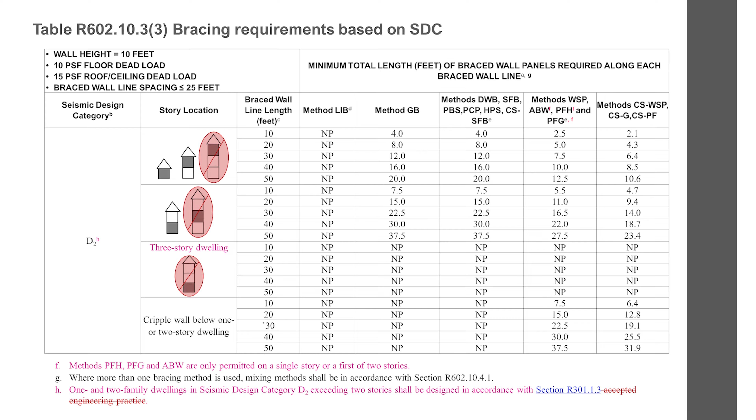Chapter 3 allows story heights up to 13 feet 7 inches now, which we went over earlier. And all of the heights shown in the condition column of this table are consistent with wall heights, not story heights. We pointed out the model code inconsistencies here to the International Code Council and found out they are providing further clarification in the 2024 IRC consistent with this amendment.

And footnote G is new, which just reiterates the model code change we just talked about that clarifies three-story dwellings in seismic design category D2 require a non-prescriptive design in accordance with Section R301.1.3.

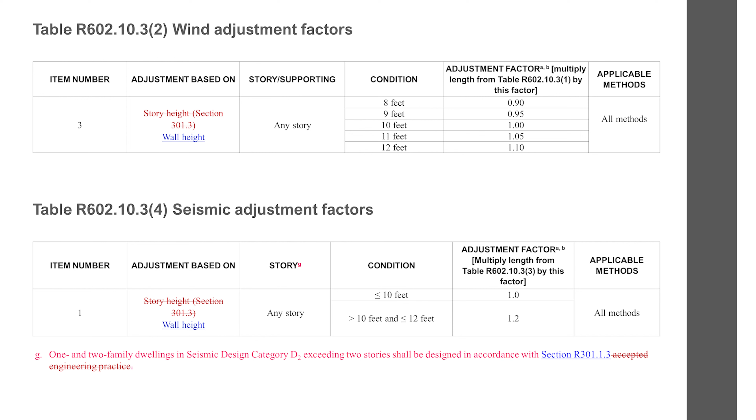A new Oregon amendment in the wind and seismic adjustment factor tables changes the name of the story height adjustment factor to wall height adjustment factor for consistency with the rest of the code, and a new model code footnote has been added to clarify three-story requirements in seismic design category D2.

We won't be looking at the specific changes in the wall bracing for dwellings with stone and masonry veneer in high seismic sections, but just be aware that the whole section has been reformatted, reorganized, and clarified for consistent application of the provisions.

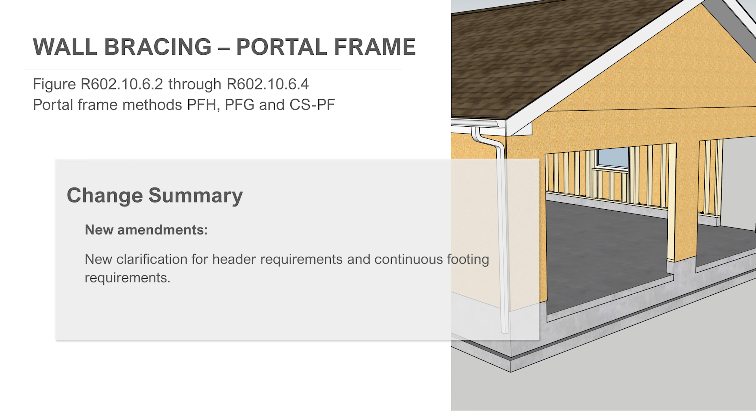Oregon amendments have been made to the prescriptive portal frame figures to clarify the header and continuous footing requirements elsewhere in the code, and to help minimize chance of misapplication. We've clarified that the minimum header size noted in the figure has to be checked against the minimum header size required by section R602.7 for gravity loading design. And we've modified the foundation portion of the figure to show the foundation wall reinforcement and updated the cross section to correctly show the continuous footing.

Here's the update to the method PFG figure. Note that we reference the continuous exterior wall footing requirements per section R403.1 under the garage opening for clarification. And similarly, here are the updates to the CS portal frame figure.

Not a lot of substantive change noted for Chapter 7 of the code. However, here's a significant one regarding water-resistive barriers. At the model level, our long-standing R703.2 has expanded, adding additional prescriptive compliance options in place of the prior language, which included other approved products of equivalent performance. One reason for this change is that standard 15-pound tar paper is no longer the most common practice. Particularly in our state, higher efficacy WRBs are more commonplace due in part to our long-standing Oregon-specific drainage plane requirement of section R703.1.1.

A couple of considerations here are the potential overlap with the drainage plane requirements of section R703.1.1, in particular, the exceptions to providing the 1/8-inch standoff between the WRB and the exterior wall covering or veneer, and the distinction of the two provisions. For example, if we are using 15-pound felt and we aren't providing pan-flashing details at all window and door openings, we must provide the 1/8-inch standoff between the exterior veneer and the WRB. It is important to remember that section R703.2 compliance is only one piece of meeting the R703.1.1 drainage plane provisions.

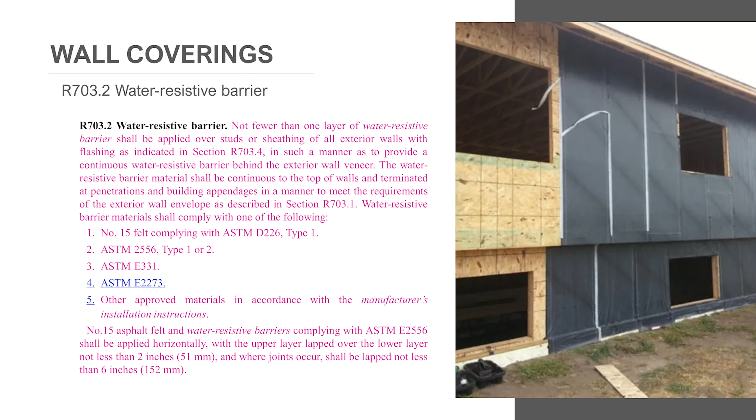The other major change in Chapter 7 is the introduction of a prescriptive path for all soffits. These provisions are organized based on site design wind pressure, as we'll see on the following slides. Previously, there were no specific provisions regarding soffit material and soffit fastening in the code.

In new section R704.1, we see the charging guidance of the new section. Where our wind pressure is 30 psf or less, we go to section R704.2. Where our wind pressure is greater than 30 psf, we use R704.3. How do we determine the wind pressure being referenced here?

These subsections round out the rest of the soffit section. For wind pressure of 30 psf or less, we see R704.2 and then the associated subsection based on material. For wind pressure greater than 30 psf, we see R704.3 and then the associated subsections according to the material used. In both cases, note that the prescriptive soffit materials are limited to vinyl, fiber cement or hardyboard, hardboard lumber, and wood structural panels (WSP), such as exterior plywood or oriented strand board (OSB). If the material proposed is not one of these, then the charging language guides us to use the manufacturer's written installation details, aka the MIIs or the cut sheets.

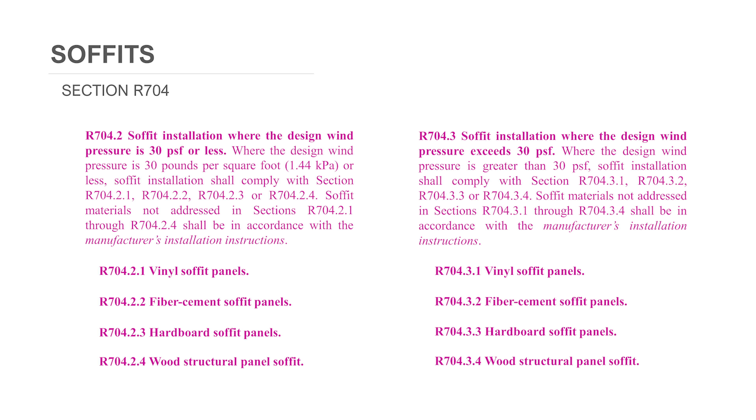Appendix F, Radon Control Methods. The changes made to Appendix F were intended to align more closely with the EPA's nationally recognized standards for radon control.

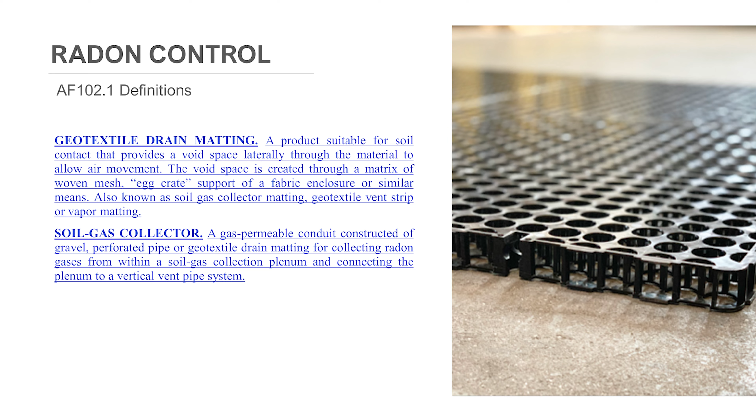The primary change to Appendix F has to do with new provisions for soil gas collectors. Under the previous requirement for a passive gas collector system, a pipe had to be vented up through the roof and it just needed to have a T under the vapor barrier in the crawl space. There was no extension of the pipe, and this made it difficult for future expansion to an active system.

So if the passive system isn't working and you have to add a fan, which there's a requirement for an electrical outlet in the attic for a future fan, then work had to be done in the crawl space to make that new active system effective.

So now there are three different requirements. You can extend 10 feet of perforated pipe, 5 feet in each direction from the T. You can do a geotextile drain mat that we talked about on the last slide under definitions, or you can have a trench of gravel. But any of these three provide a longer area than just a T for the gas to be pulled out if an active fan is added later.

Appendix H, deck, patio, or porch covers. This change aligns the title with changes that were made back in Chapter 1 and adds deck and porch to what was otherwise patio covers, and also adds some clarifying language.

To add to light straw clay and straw bale appendices, we now have a new appendix, Appendix U, addressing a more prescriptive approach for cob construction. This methodology is often referred to as Adobe and is common in some areas of the Southwest and Midwest. There are quite restrictive limits on seismic design categories, and the appendix still relies heavily on non-prescriptive design, as Jeremy from our team covered previously in this presentation.

Often, local land use laws may further limit the potential for landowners to construct unique dwellings such as cob homes. Our team often receives customer inquiries regarding cob construction options, and we now have a related appendix detailing additional minimum requirements for customers to consider when evaluating the options for cob designs.

3D printed homes is a methodology that has become a trending option for increased housing production and increased density in areas of our nation. New subdivisions have been successfully constructed using 3D printed construction standards in Texas, Arizona, New Mexico, California, and there are even several current projects here in our state of Oregon.

This new model appendix is short, relying heavily on R104.11 and the AM&M request path, but it does codify the UL 3401 standard, which outlines a performance compliance methodology for 3D printed homes.

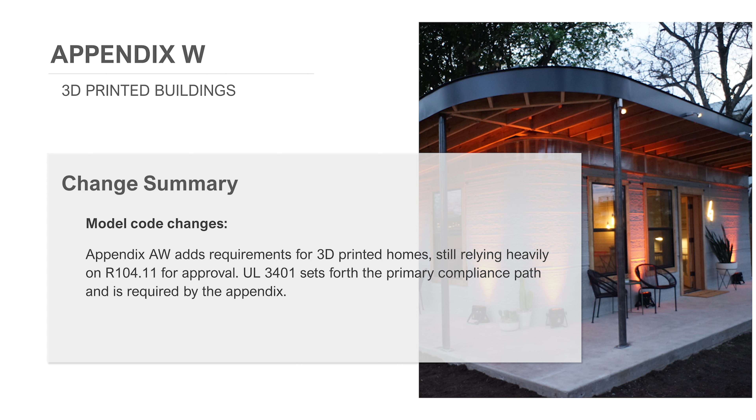Congratulations! This completes the 2023 ORSC Code Update Training.